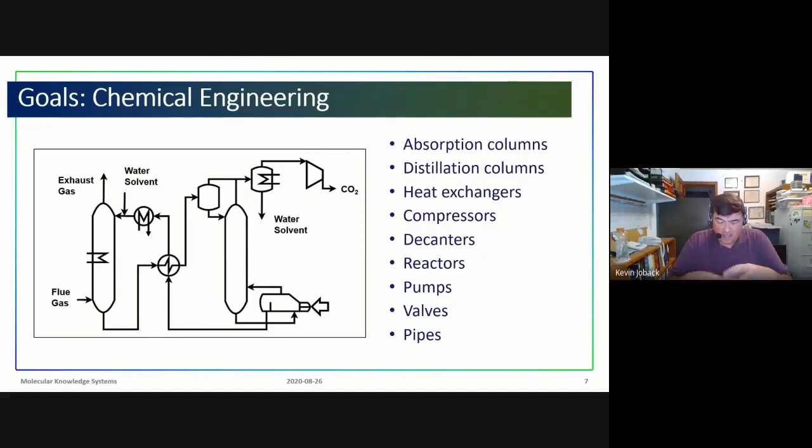When you think of designing a chemical product, there's pieces also. There's parts that we put together to make a product. We put together freezing point depressants, corrosion inhibitors, solvents, thickeners, surfactants, colorants, and sometimes we try and blend these together into a formulation, or sometimes we try and build all this function into a single unit, which for us would be a single chemical.

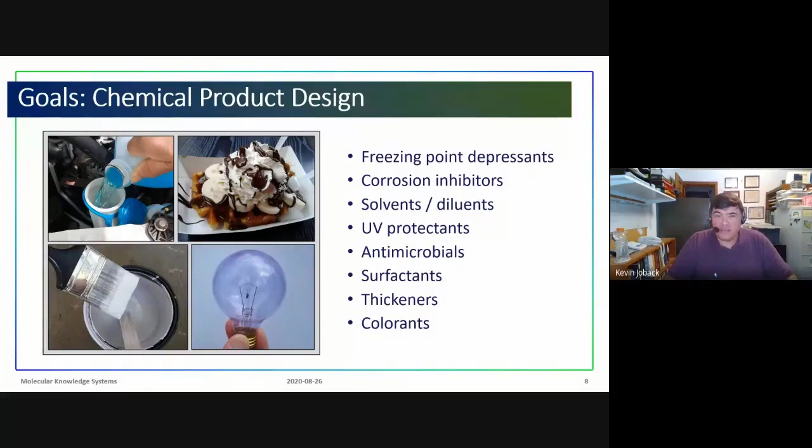And so what I really want to show is that when we think about chemical products, it's not going to be that different, or you won't need to learn that much. Your basic understanding of chemical engineering will be very useful. You'll understand reaction equilibria, light absorption, phase equilibria, viscosity, fluid flow, rheology. You'll see that they're both applicable to designing processes and designing products.

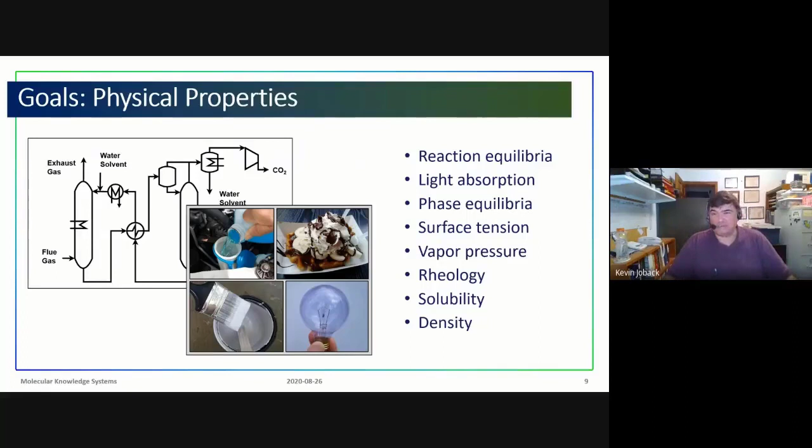So with that, let me start talking about a very fun chemical product. What we have is a ballpoint pen, or specifically the ink within ballpoint pens. If you look in the U.S., there are patents that go back to the 1800s for ballpoint pens, and it's a simple concept. You basically would have a container, basically the tube that holds ink. The ink has to have certain properties, and at the end there's a ball, and basically the ink coats the ball, and the ball rolls on a surface and deposits the ink.

The interesting thing is ballpoint pens came up in the 1800s, but it wasn't until about the 1950s they became popular. And it wasn't a problem with the pen. It was a problem with the ink in the pen. That was what was important. And if we take a look and just think about ballpoint pen ink, we have to think, what does it actually have to do? It has to do a lot of things, actually.

The main thing for a ballpoint pen is it has to stick some kind of colorant onto a piece of paper. So you can imagine we have, let's say, a bunch of pigments, little tiny particles, and we want that glued onto a piece of paper so we can see what we're writing.

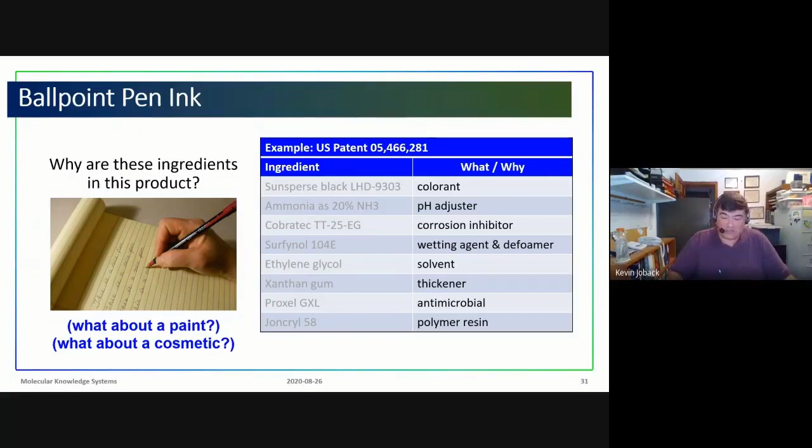And this is useful because we thought about ballpoint pen ink. What about similar products? What about a paint or a cosmetic? If we think about mascara, in some sense it seems like it's similar to an ink. It's supposed to coat a surface.

In this case, it's a particular hair, and it has to have a certain color. And if we go through, here's a formulation for, again, a common mascara. It has very, very different ingredients, though, from what we think of a ballpoint pen ink.

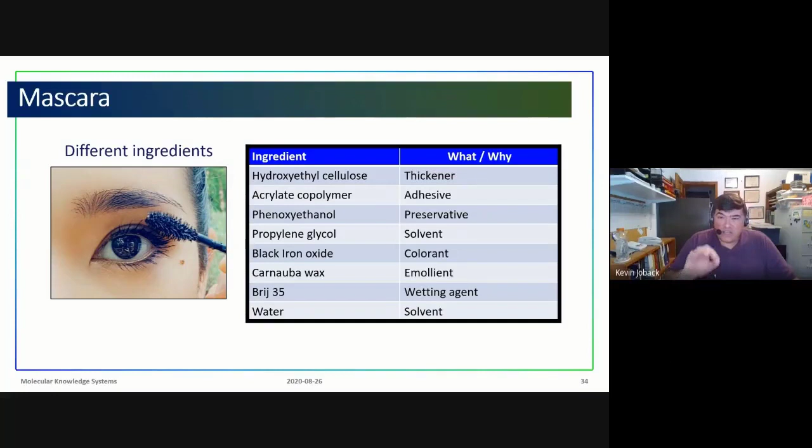However, if we look not at the ingredients, but at the purpose of each ingredient, then we'll start seeing that, again, this has a thickener, it has an adhesive, has preservatives, solvents, colorants, has an emollient, which is a new thing, but it has a wetting agent or surfactant and a solvent. So again, if we focus on what the tasks are that have to be accomplished, you can see it's very, very similar.

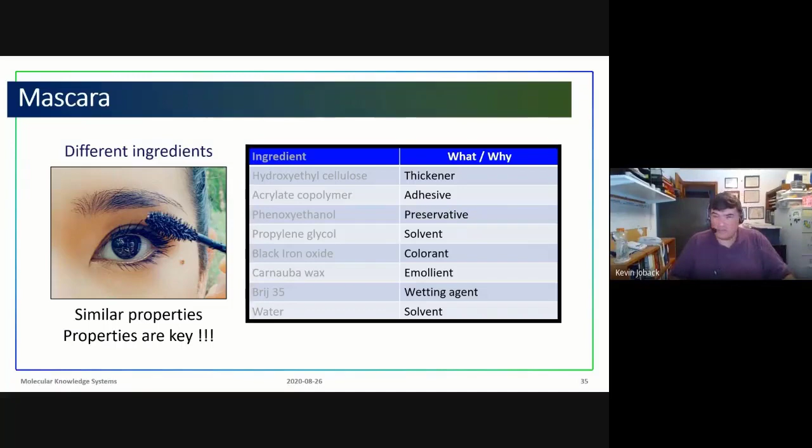If we focus on the physical properties, we don't care about the actual solvent involved, but we know it's a solvent that has to dissolve things and has to evaporate. If we focus on the properties, then we have an easy way of addressing all kinds of different physical chemical products. So that's the main concept I really want to convey here: physical properties are the key. Don't focus on the chemicals at first. Obviously, we have to pick them later, but you focus on the properties at first.

And then once you have the physical properties, we go about trying to say, what are the actual chemicals that have those properties? So what I want to do is show how you go about doing this, and we'll talk about a few other products: things like light bulbs, shaving creams, aircraft anti-icing fluids, and even artificial blood. These are very varied products, but I want to show how we can understand these if we focus on properties.

At this point, I just want to make sure that I'm coming through okay. I don't want to end up just talking to myself for a while, and just wanted to check in if there's any questions or any issues as far as the presentation goes. So, Veronica, is everything sounding good? Well, I think it's better you go ahead, and after people may ask. Sounds okay? Very good. All right, thank you.

So let's just quickly go through some of these. One product that I enjoy very much is a light bulb. People don't often think about light bulbs. I have one here. But they're a very intriguing chemical product. If you think what a light bulb has to do, it basically has inside a filament made of tungsten that's heated up to extremely high temperatures, 2400 K. This is one of the hottest temperatures on Earth.

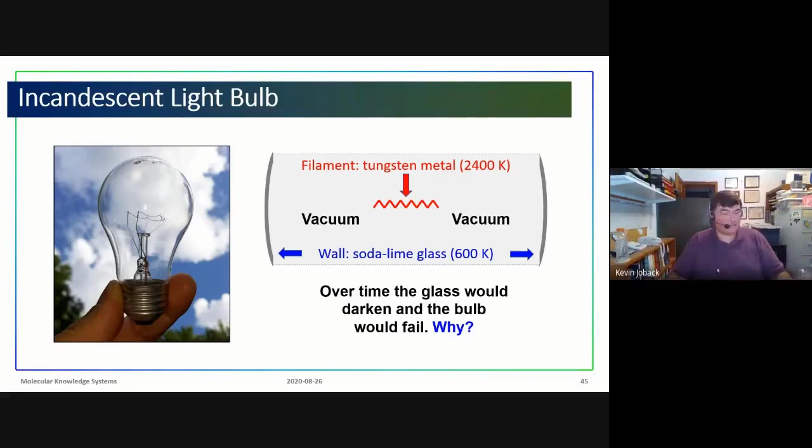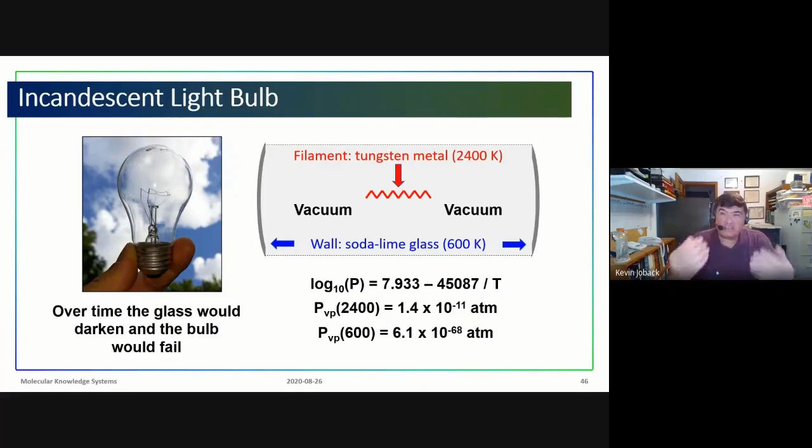Well, if you think about it, we have an interesting mass transfer problem. If you look at the vapor pressure of tungsten, people say, well, tungsten's a metal, but it still has vapor pressure. And especially at 2400 degrees, you would actually get some of the tungsten evaporating. Here's what would happen. On the left we have the tungsten filament at 2400 K. We have a cold wall, colder at 600 K.

So in essence, the tungsten would evaporate from the metal and deposit on the cooler wall. Over time, the tungsten would continue to move toward the wall, and you would end up with less and less tungsten in the filament, more and more tungsten on the wall, which would get darker and darker, and then finally the filament would fail. So as an engineer, you start looking at this and saying, how can I model this process?

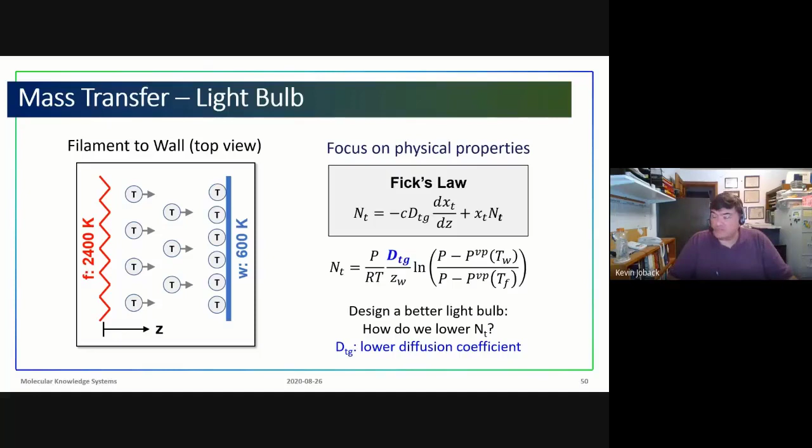Well, my focus is, again, on physical properties. So you can say, well, what physical property can we change in this equation? And in this case, this is the diffusion of tungsten through the light bulb. And originally they put in a vacuum, but suppose we put in something else, something to get in the way. How could we lower the diffusion coefficient of tungsten through, let's say, a gas?

And if you look at the models for diffusion coefficient, you have this nice complicated equation here, which you don't have to worry about. The key part you have to look at is in this equation, this estimates the diffusion coefficient of tungsten through gas, and we say it's a function of a variety of parameters and the molecular weights. 1 over the molecular weight of tungsten plus 1 over the molecular weight of the gas. And if we pick a variety of gases, like we show here on the right, nitrogen, argon, krypton, xenon, we can calculate this sum, this ratio sum.

And we want diffusion coefficient to be low, so we should have our ratio be low. And you can see here, nitrogen has a nice low number, argon's better, krypton's better, xenon's better. So as we get a heavier gas that gets in the way of tungsten, it works better. Unfortunately, if you look at this table, we can see that not only as you go down the table do you get better performance, but you also get higher cost. And so thus, as a good chemical engineer, you have to try and optimize this. How can we get good performance while having reasonable cost? And so it's just a standard chemical engineering design problem.

So I wasn't the first one to think this up. In 1916, a researcher by the name of Irving Langmuir, who's very famous in surface chemistry, got a patent to do this. He was working on light bulbs, and he basically came up with the idea of putting in a gas that would extend the life of light bulbs. And there's a lot of other surface chemistry involved in the filaments of light bulbs. He went on for halogen light bulbs and went on for much, much more contributions to surface chemistry. So again, physical properties and chemical products help you come up with many ideas for many areas.

I'm going to hop from light bulbs to artificial blood. The idea of artificial blood is that human blood is needed for medical operations, procedures, emergencies, but it has very limited shelf life. It has to be stored very carefully, and there's not a large supply at times, and other issues. So it'd be really nice if we could make something to substitute for human blood when needed.

Just like we did with our pen, we go through and say, well, what would this blood substitute have to have? Main key thing, blood has to absorb or carry a great deal of oxygen and carbon dioxide. It has to be obviously compatible with blood. It cannot have other bad side effects, and it has to be able to be stored for a long time. One of the key things, let me hop back here.

If we then say, okay, what chemicals have high solubility for oxygen and carbon dioxide? We see that perfluorinated compounds seem to be the best. And they have very good solubility for oxygen, a good solubility for carbon dioxide. But if you look at these chemicals shown here, perfluorocarbons don't seem to be very polar. In fact, they're very non-polar chemicals. Blood itself, it's in essence salty water, so it's a very polar substance.

And so we kind of sit there and say, okay, how are we going to mix this non-polar chemical with this very polar chemical? And this is, again, the same way in a chemical process. When we see certain situations, we say, we have to distill this or we have to extract it. Whenever you try and mix very different chemicals in a product, you typically say, well, we have to use some kind of, let's say, an emulsion or dispersion or such.

And invariably, that means we're going to have to use some surfactants. And in fact, this is what we do. We basically create an emulsified system in which the oxygen carrier is in the middle. So this is our perfluorocarbon. And we have an emulsifier phase. This is our surfactant that surrounds the perfluorocarbons so that it can basically be dispersed within our continuous phase, which we say is mostly water.

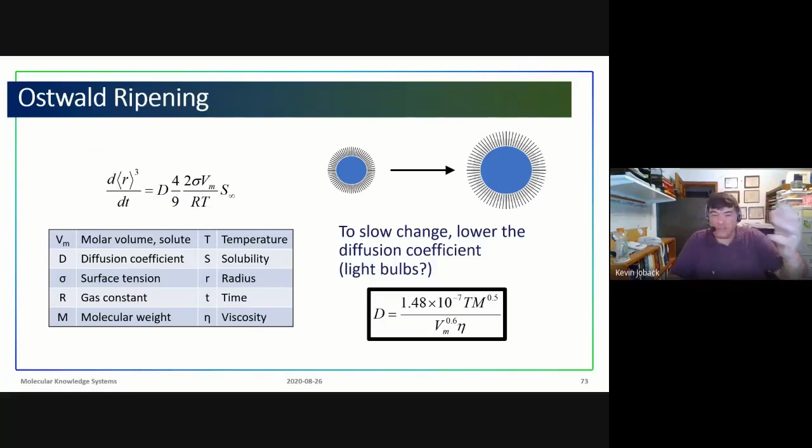Now, this is a diffusion coefficient of a chemical through a liquid phase. So there's different models for this than a chemical through a vapor phase. And if we look around, we can see that the diffusion coefficient in this case is a function of molecular weight, function of density, function of viscosity. And if we increase the viscosity, this is eta, the diffusion coefficient will go down, which makes sense. A thicker solution will mean that the chemical will have to take longer diffusing. And this is one way we can stabilize the emulsions. We can make it thicker by looking at the physical properties.

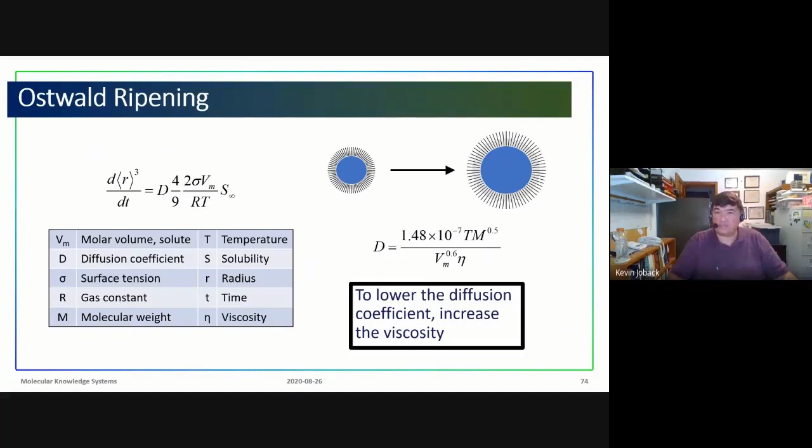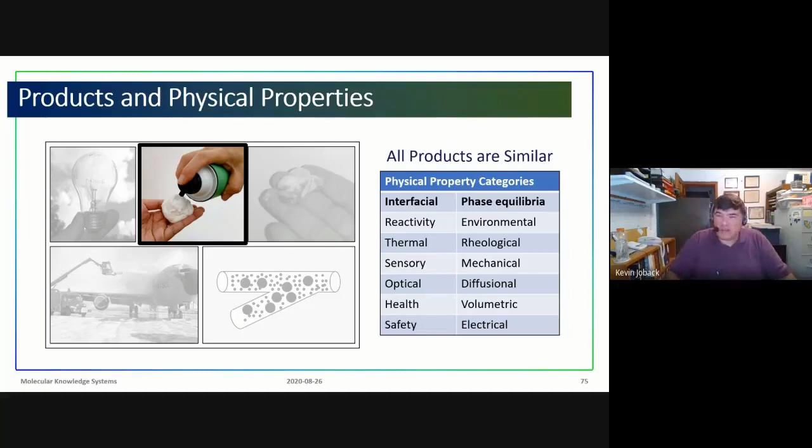So in these two products, we looked at how we can analyze and understand the physical properties and how they affect the products. We're going to go to the next step. We'll take a look at shaving cream and see how we can actually start using our property models to dream up products or maybe find substitute products.

Shaving cream is truly an amazing product. If you think about it, you basically shake up a can. This is what's called a foaming shaving cream. So shake the can, push the button, and a foam comes out. So how does that actually work? If you look at the ingredients, you'll see that we have sodium lauryl sulfate, triethanolamine, all these things. We have isobutane, propane, and we have water. Once again, isobutane, propane, non-polar chemicals, water, very polar. If they're in the same product, that means that probably all the other stuff in there has to be surfactants of some kind.

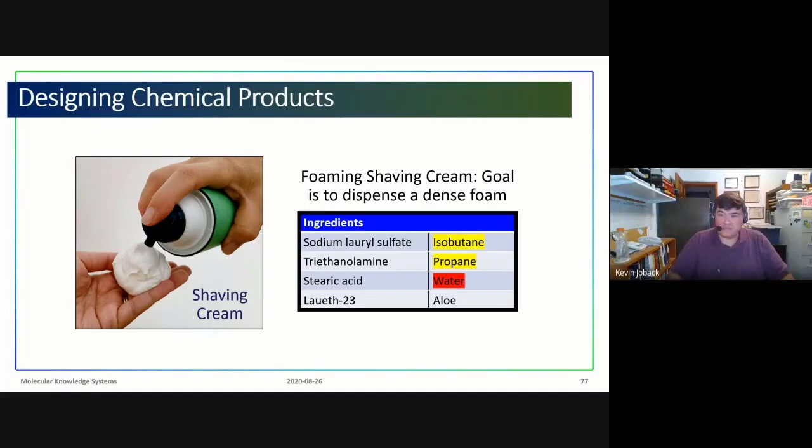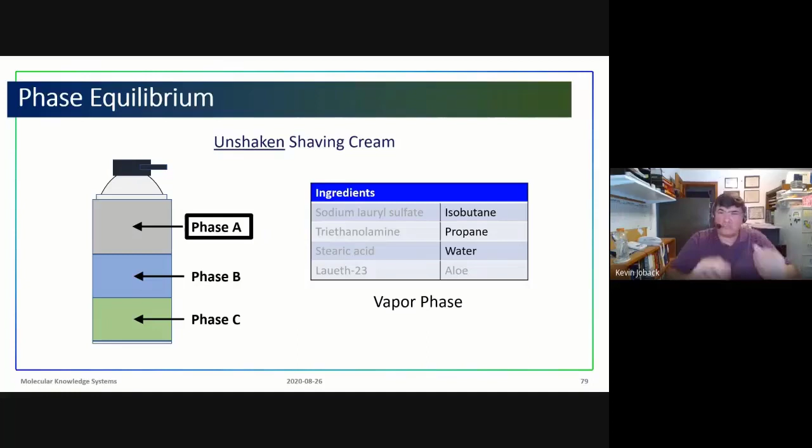So we know that we're starting out with a dispersed system of some kind. So how would this work? If you look at shaving cream sitting there, there's actually three phases. Phase A is a vapor phase, and probably the hydrocarbons, the isobutane, propane, and some water would be in the vapor phase. Imagine this is sitting at room temperature.

B would be a liquid phase, and it's probably under pressure. Isobutane and propane would be in the liquid phase. They're less dense than water. And then we would have the water phase. And the water phase would contain water, probably the surfactants, but the surfactants probably would be right at that interface between phase A and phase B and phase C. But this is unshaken shaving cream.

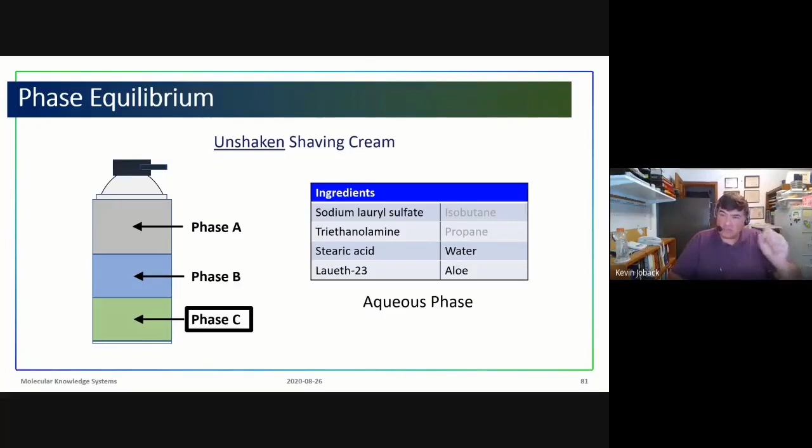So now we take the shaving cream, shake it up, and we actually end up with two phases. We still have our vapor phase at the top, but our phase D is now an emulsion. We basically have a phase D2, which is our continuous phase, and D1 actually contains our hydrocarbons. So our hydrocarbon surrounded by a surfactant in a continuous aqueous phase, somehow similar to our artificial blood.

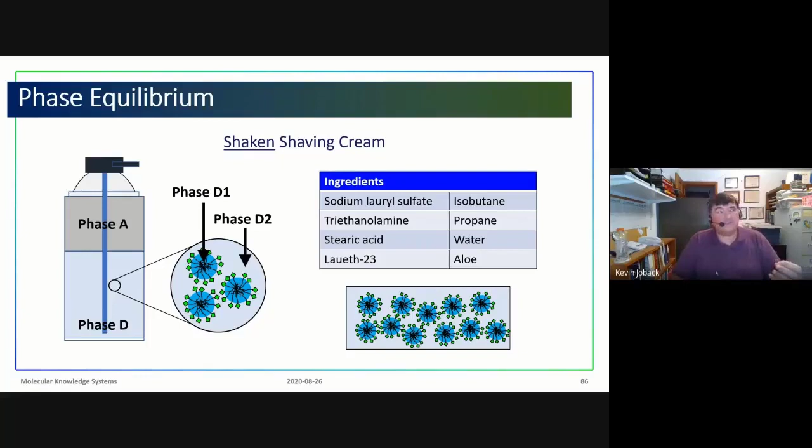The intriguing thing is when we push the valve and this stream comes out, we now have a stream of basically water with some hydrocarbon particles inside. We want this to make a foam. So the idea is inside the can, we're at a relatively higher pressure. The hydrocarbons are a liquid. If we pick just the right hydrocarbons, when the foam comes out at a low pressure, those hydrocarbons will vaporize. And so this is what we do.

But there may be other chemicals that give you even a better behavior. And this is a way of using, again, our physical properties or chemical engineering knowledge to say, hey, how could we find a nice chemical or a nice mixture that, at a reasonable pressure, just a couple atmospheres, is a pure liquid, and then at atmospheric pressure is a pure vapor.

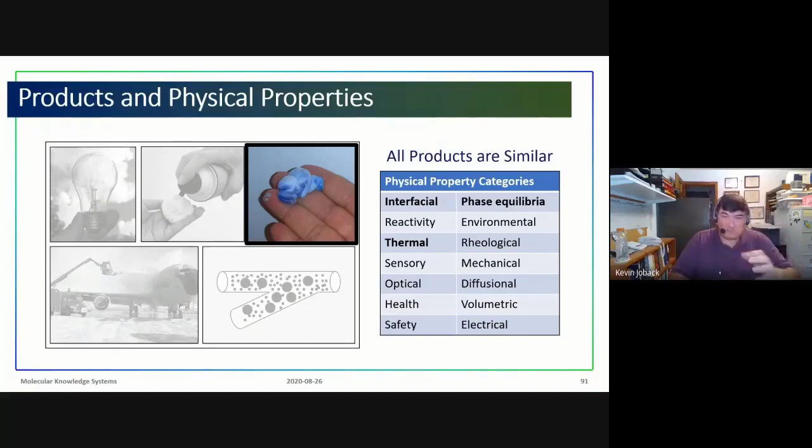So, interesting combinations. Let's look at another kind of shaving cream. This is what's called a post-foaming shaving cream. So this foams only after the shaving cream is applied to the skin. What happens is, again, we look at a formulation, many ingredients, and it seems very different than the other kind of shaving cream. But if we look at it, we have colorants, which we didn't have before. We have fragrance, which we didn't have before. Okay, so this is making it look nicer.

We have all these thickeners in there. Well, this is a nice thick gel, so that's probably what this is in for. We have similar chemicals to what we had before. We had aloe, water, and again, we see, in this case, isopentane and isobutane. So these are hydrocarbons and water. So it seems like things are going to behave just as they did before. We have a hydrocarbon and a water and surfactants.

However, what we want this product to do is actually come out as a gel and then foam afterward when it's rubbed on the skin, rubbed on the face. And so once again, we look at different phase diagrams, and we end up looking at different hydrocarbons in this case. We'll see at point 1, this is now a temperature versus composition vapor-liquid equilibrium diagram.

So again, at low temperature, we have a liquid condition. So actually, if we choose the right composition, it'll come out of the can as a liquid. Then we want it to vaporize. So the question is, at what temperature do we want it to vaporize? At point 2, we want it to vaporize at the temperature of the skin.

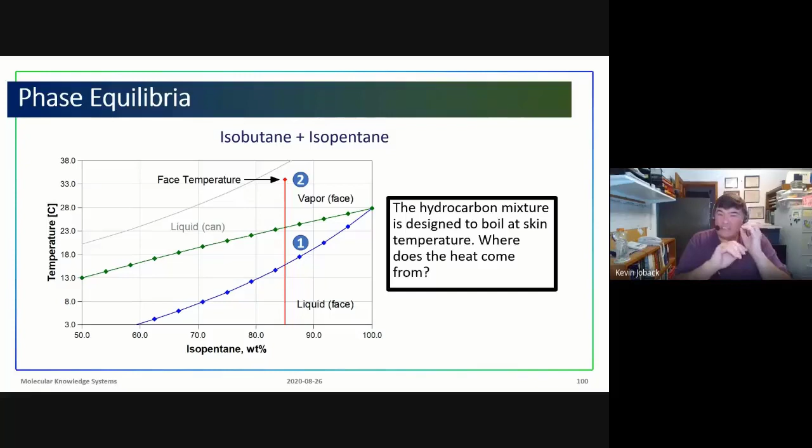So in essence, what we're going to do is pick a liquid, in this case, a hydrocarbon mixture that's designed to boil at the skin temperature. And people often ask, well, where's the heat come from? In essence, it comes from your face. You're boiling this hydrocarbon mixture so that it would vaporize, surrounded by a surfactant, and that's what makes the foam.

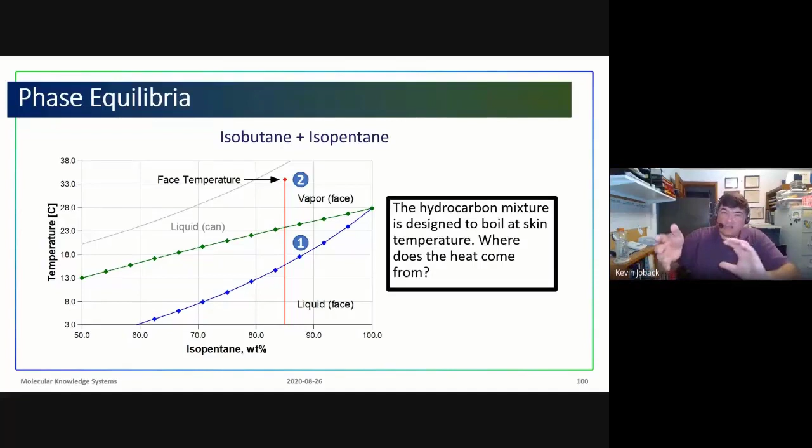And once again, once we look at the vapor-liquid equilibrium diagram, we have our temperature limits. We can pick different chemicals, different mixtures, different compositions, and try and find just the right one that works well, that gives us a nice big vapor at skin temperature. And of course, as an engineer, we also have to check out the costs and other properties associated with that.

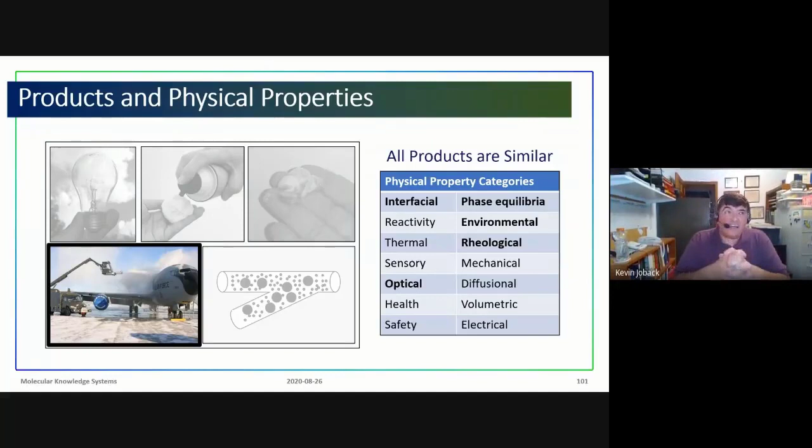All right, just one more example of a chemical product. This is something called aircraft anti-icing fluids. In many parts of the world, it gets very cold in the winter months, cold enough where we have ice and snow that will land on aircraft.

And for an airplane, it's very important that the wing is a very smooth surface. Any accumulation of ice and snow disrupts the airflow, and a disrupted airflow causes loss of lift, which is very important when the plane's taking off. That's when we need a tremendous amount of lift. So what we do is we actually put a layer of, you can think of it as antifreeze. It's a layer in which incoming ice and snow will melt, and that way you won't have any accumulated ice and snow.

One of the tricks, though, is we now have a layer of antifreeze. That also isn't good. So somehow that has to come off before the plane takes off. And what we actually do with anti-icing fluids, we design a liquid that has just the right viscosity. It's thick enough that when it's not being used, it just sits on the aircraft wing. But as the plane starts taking off, the viscosity drops and it'll shed off the wing so that the wind from the takeoff will basically pull all the anti-icing fluid off the wing.

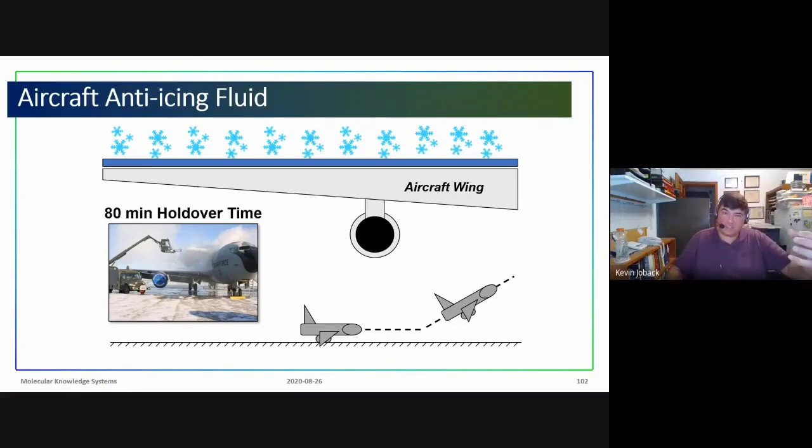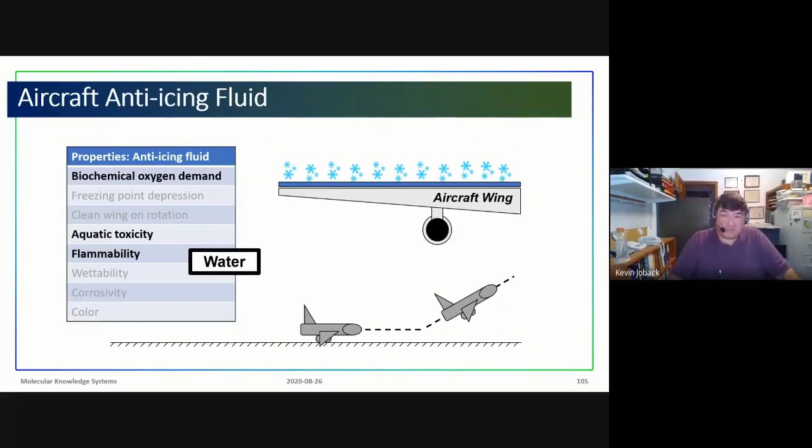This may sound somewhat familiar to our ink in our pen situation where we wanted it to be thick and we wanted it to be thin. Same case here. So if we go through again, we look at our different requirements for our anti-icing fluid. Obviously, we don't want it to be toxic. We want it to be safe for the environment. It should not be flammable. One trick, whenever you want something safe for the environment and not flammable, is to use water. It's a wonderful addition to most products. It also kind of reduces the cost for most products.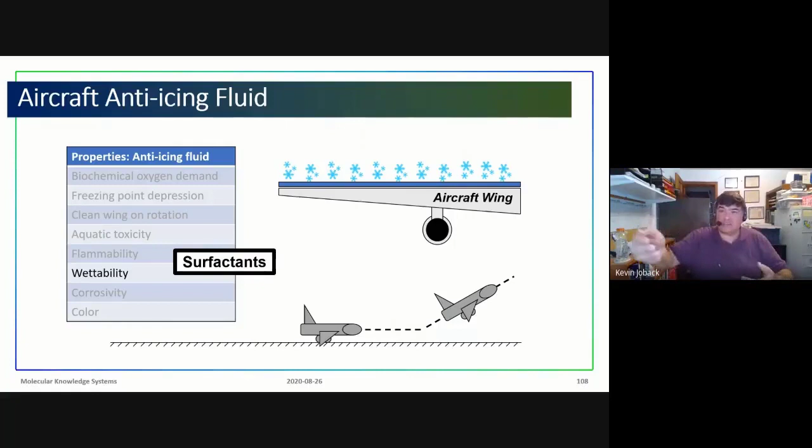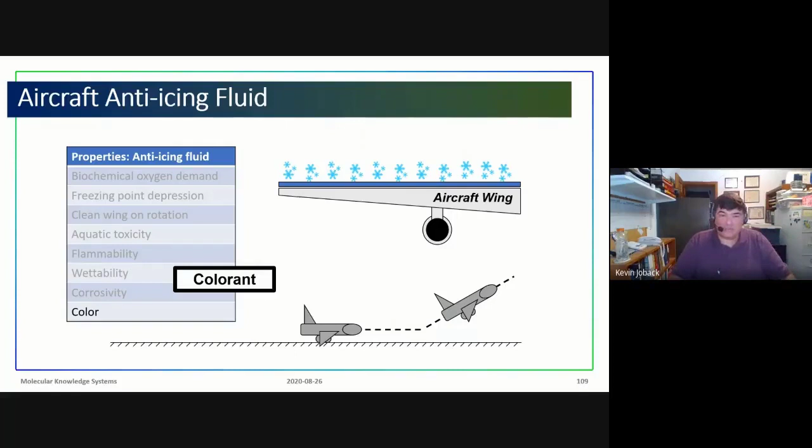It can't be corrosive. We're going to put it on airplanes. So we're going to have to put a corrosion inhibitor in here. It has to wet a surface. So again, wetting a surface or making two chemicals compatible, in this case, water and a usually aluminum surface, we need a surfactant. We have to add a colorant just so it's easy to identify what chemical to use. And then we have freezing point depressants. So now we can go through and do some chemical engineering.

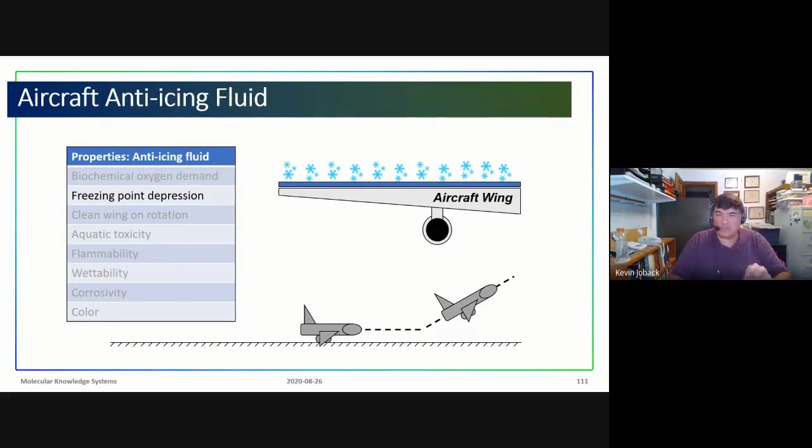If we look at the freezing point depression, we can do, in this case, a solid liquid equilibrium diagram. And I showed a diagram here for ethylene glycol and water. And in essence, if you make a specification, you could say at minus 25 degrees C, so this is again a solid liquid equilibrium diagram, temperature versus composition. At low temperatures, we have a solid. Above the curve, it's a liquid. In essence, under the curve, to a certain degree, we have a two-phase system.

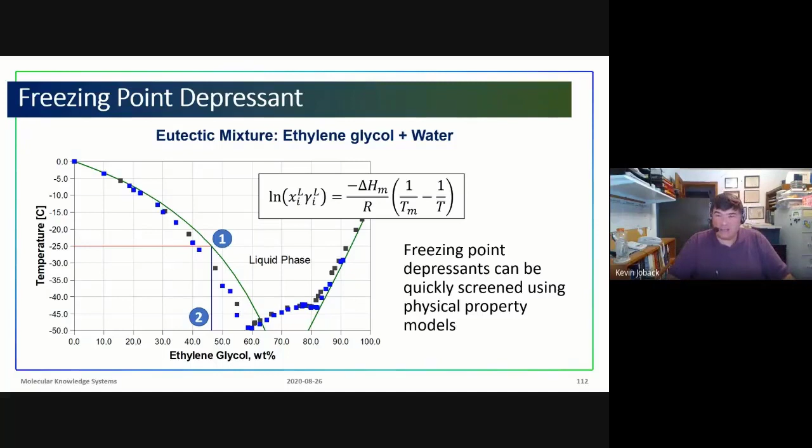But on the curve at point 1, you could say, well, if we have this composition, which you can read off at point 2, I can say that that composition of ethylene glycol and water will not freeze until minus 25 degrees. So this is a way, again, we can go through looking at different chemicals, different solid liquid equilibrium diagrams to see what chemicals would work and to figure out maybe if we can get replacement chemicals. It's a way of designing and screening different chemicals.

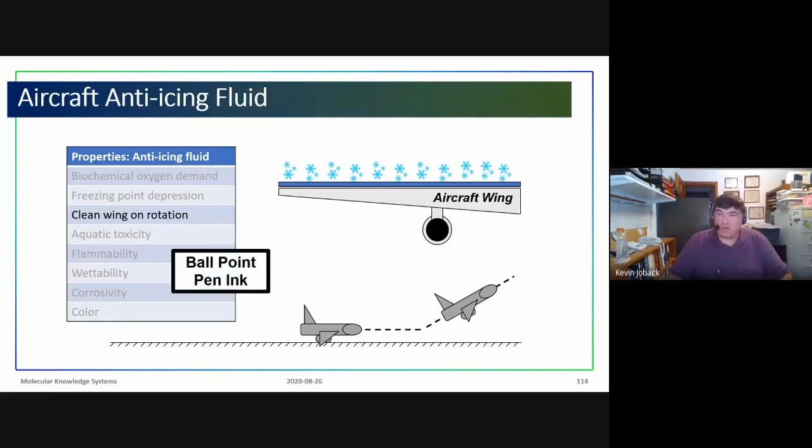The clean wing on rotation, in other words, clean wing as the plane starts taking off, same approach. Think of the ballpoint pen ink. And what we use in this case, we think of a shear thinning fluid. We think of something that we can add in to cause the viscosity to be thick when there's no shear. And then when the plane starts taking off, the air passing over the wing will cause high shear and cause the viscosity to drop.

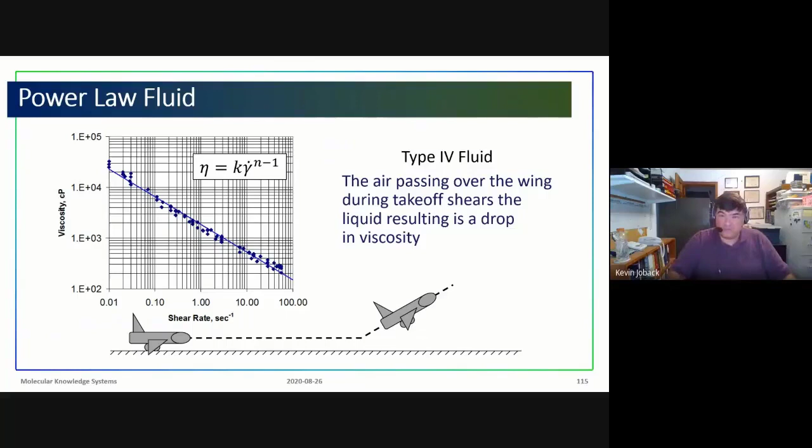And in fact, we use what's called a type 4 fluid. We put in chemicals, everything from xanthan gum and so forth, that will create a power law fluid, so the viscosity will drop quickly. And this is an example formulation.

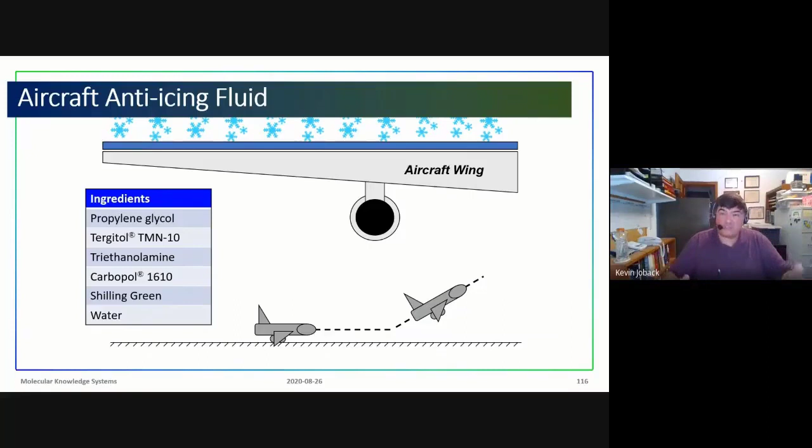We have things like propylene glycol, which is our freezing point depressant. Tergitol is our surfactant. Triethanolamine is our corrosion inhibitor. Carbopol is our thickening agent. The green is a colorant. And water is our solvent. So once again, the idea is that if you start looking at the properties, all these products start making some sense of how they're designed and understanding how to design them.

I just have a few minutes. I just wanted to say that was the first part. We talked about looking at products and figuring out how we should design them in terms of their physical properties. How would we go about the second part? Once we have properties, how can we go about making something that has those properties? Let me just use a quick example: the idea of what's called a paint remover or a paint stripper.

If you have a painted surface, you put a certain chemical on, and that chemical soaks into the paint and actually causes the paint to swell. The paint you consider a polymer. As the solvent dissolves into the polymer, it will swell. It causes forces inside the polymer, and if you pick the remover correctly, those forces will be greater than the adhesive forces, and the polymer will actually swell and wrinkle and fall off the surface.

If we look at a common paint remover, it's N-methylpyrrolidone. And if we look at its various properties, we can say, well, okay, this is a good chemical. We know from experience it's a good chemical. Unfortunately, for various reasons, people want to replace this chemical. So what might we come up with? We might say, let's dream up a new chemical. Would it have the same physical properties as NMP? If it has the same properties, it probably will have the same performance.

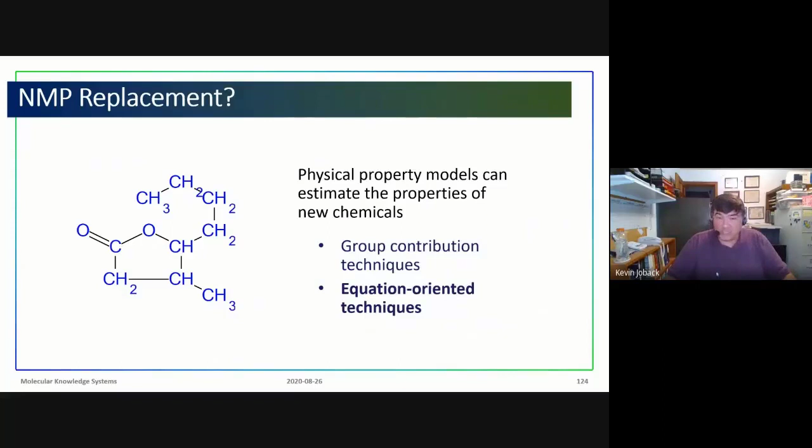We could always go and measure this, but if we want to evaluate dozens or hundreds of chemicals, it would take a very long time to do that experimentally. Fortunately, we can use physical property models, specifically group contribution techniques and equation-oriented techniques. Let me just briefly go through what each of these are. You've probably been exposed to these. Group contribution techniques have the idea that given a molecule, we can break that molecule into groups, and that each group will have a certain contribution.

So in this case, we take our molecule, we can break it into CH2 groups, CH3 groups, CH2 groups, CH groups in a ring, CH groups again in a ring, oxygen in a ring, and a CO group in a ring. Each of these pieces contributes a certain amount to a physical property, in this case, the boiling point. CH3 has a contribution of 23.58. If we total these up, we can get an estimate. So we can dream up a new molecule and we can estimate a physical property.

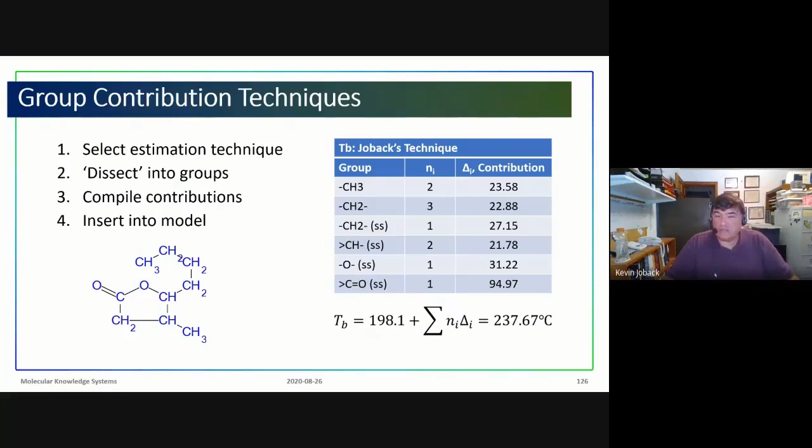Once we have a few physical properties, there's equation-based techniques which let us estimate more. Here we have a model for the vapor pressure that's dependent on properties like boiling point, critical temperature, and critical pressure. So if we know these values, we can estimate the vapor pressure. What's nice is many of these basic properties we can get from group contribution techniques. So now we have a general idea.

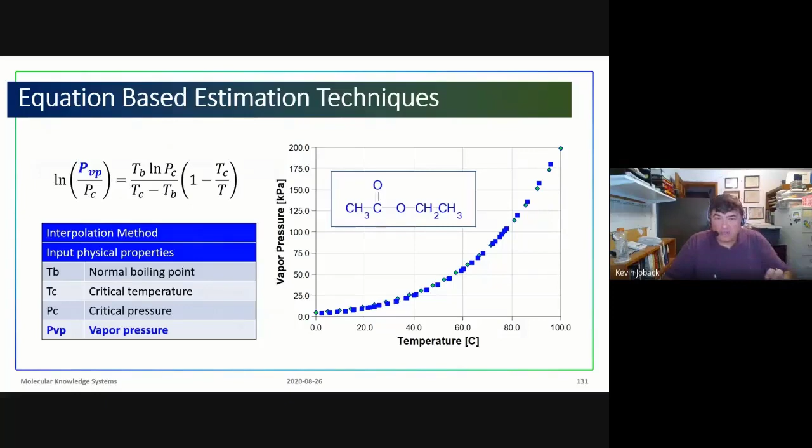If we want to design an N-methylpyrrolidone replacement, we can say, here's the physical properties of NMP, and we give it a certain range. If it's close to those physical properties, within a min and max, that looks good. We can dream up a new molecular structure, use group contribution techniques and equation-oriented techniques, check to see if the property's in the range, and we can have maybe a new chemical.

So, for example, we can pick this chemical shown here, just dream it up. We go through our estimation techniques, use group contribution techniques for boiling points, critical temperatures, and critical pressure, use equation techniques for vapor pressure, and we can check. The estimated vapor pressure for our new chemical is 27 pascals. And the range is between 11 and 51. So this looks good. In fact, it looks very good, and we can keep doing this over and over again.

We can dream up a new molecule, but it will take a long time if we keep estimating one by one. So quickly, what I want to show is that we're able to teach the computer how to create molecules. We tell the computer basically, here's all the combinations of groups we want to make molecules from.

So the computer will pick all combinations of two groups and try and make molecules from those. It will then go through all combinations of three groups, in which in this case there are 680 ways of picking these groups 3 at a time. Likewise, combinations of 4 groups, and so on.

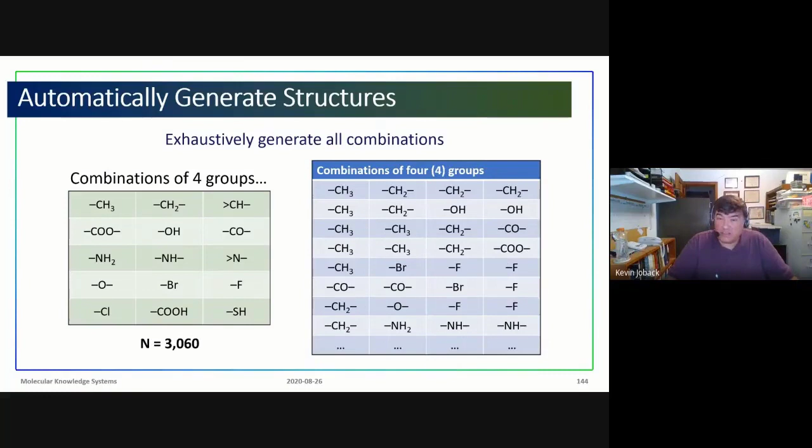Now what happens is we have to tell the computer if you can put these pieces together, and there are some very simple equations that show that if you take a group of pieces of molecules, they have to satisfy the equation shown here, where B is the number of bonds, N is the number of groups. We total things up, and we can see this first collection of groups cannot be connected together. There's just not enough places where we can connect things. However, the next set of groups, we can.

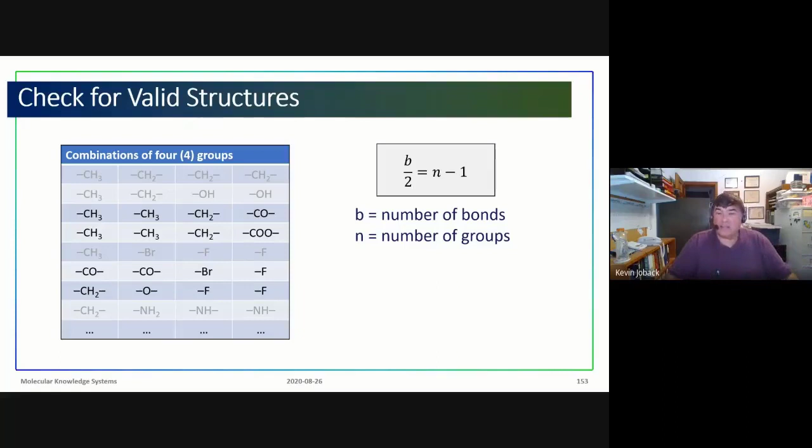So now we have a way where the computer can take pieces, put them together, and check to see if these are valid molecules. We also tell the computer that there are certain kinds of combinations of groups we don't want. And we actually can make a computer system that will automatically put together molecules, see if these are new molecular structures, estimate the physical properties, and check if those properties are what we want for our new product.

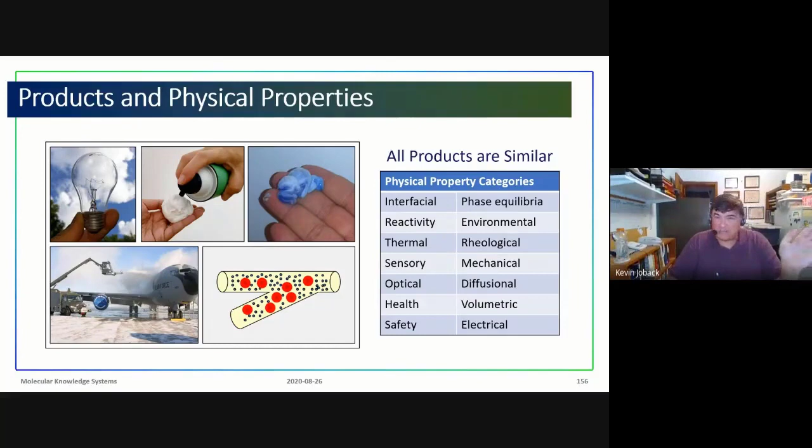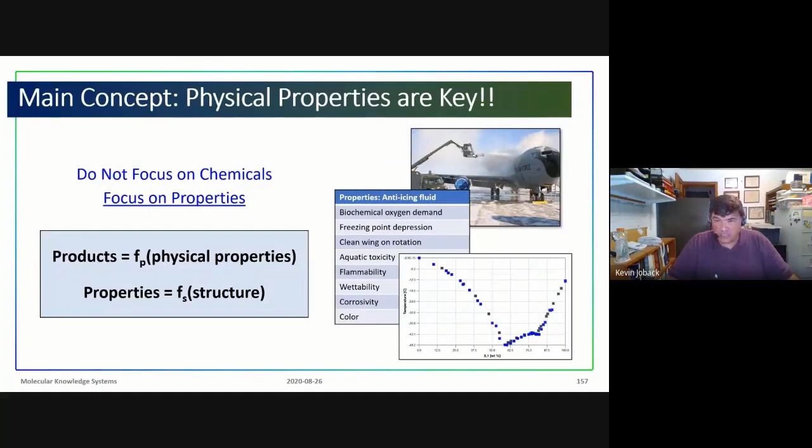So again, what I wanted to do today was talk about physical properties and their importance in designing chemical products. We went over a number of different products that hopefully at first looked very, very different, but now you can start seeing that they're all somewhat similar. And again, the main concept: focus on the physical properties. Those are key. So hopefully I was able to show you how we go about understanding chemical products and designing them, and next time you're in the store, take a look, see what's on the back, and start thinking what might be in there.